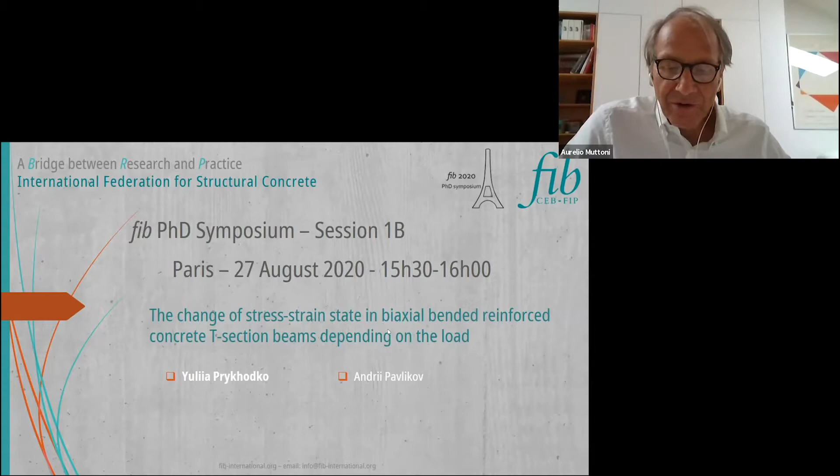Good afternoon, our best wishes from Poltava, Ukraine. The topic of my work is the change of stress-strain state in biaxial bended reinforced concrete T-section beams depending on the load. The authors of this work are Yuliia Prykhodko, myself, and Andrii Pavlikov, my PhD thesis supervisor. We are from National University Yuri Kondratyuk Poltava Polytechnic.

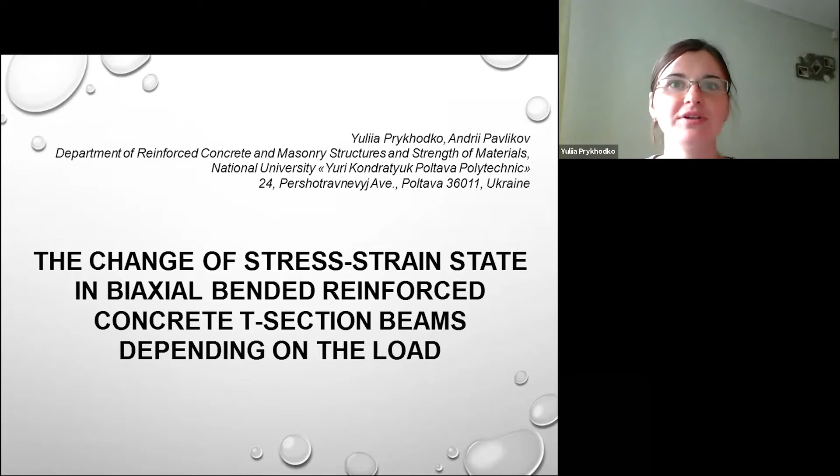In today's world, the building industry is still considered one of the most important and influential in the world. It is connected with all economical and political spheres of social life. For the development of the building industry, it's necessary to constantly improve and automate methods of calculation of building structures.

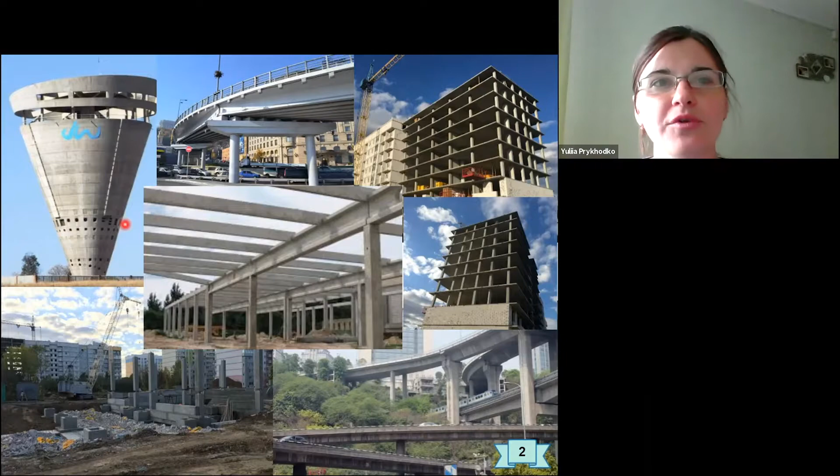In this case, an important step is the use of the stress-strain state modeling method in order to analyze the possibilities of the elements' work under compression, biaxial bending, and torsion.

Particular attention is attracted by the necessity for process-changing knowledge of the stress-strain state parameters in the normal section of reinforced concrete T-section beams. Especially important is the knowledge about the compressed zone shapes, which are determined by the position of the neutral line in the cross-section through the parameters.

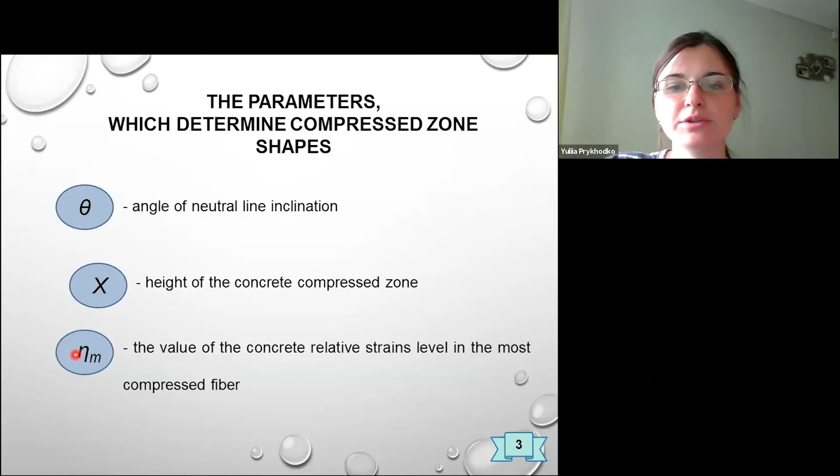They are: theta, the angle of neutral line inclination; x, the height of the concrete compressed zone; and eta sub m, the value of concrete relative strains level in the most compressed fiber.

In our work, we have identified possible shapes of the compressed zone for biaxial bended T-section beams. They are triangular, trapezoidal case 1, trapezoidal case 2, pentagonal case 1, pentagonal case 2, and hexagonal.

For each form, in the process of integration, analytical dependencies are obtained, by which it's possible to determine the coordinates of stress resultant application in such zones. For better visual perception, stress-strain state models in the normal section of the reinforced concrete T-section beam were constructed.

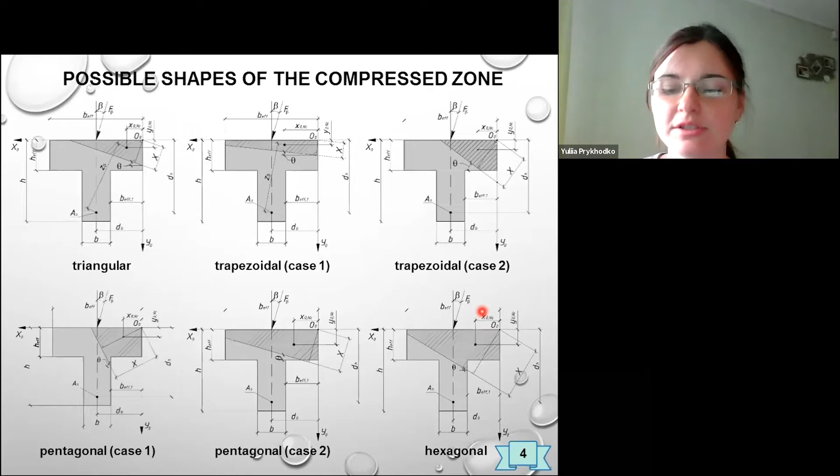To create the stress-strain state model of the bended reinforced concrete T-section element, a nonlinear diagram of the stress-strain relationship for the compression concrete was used.

For the convenience of theoretical research of the stress-strain state, the stress distribution law in the coordinate system x sub 0, O sub 0, Y sub 0, depending on the coordinates x sub 0 and y sub 0, with k equal to 2, was used.

For your attention, there are given the formulas of stress resultant in the concrete compressed zone, N sub C, and its application coordinates x sub 0 C and y sub 0 C for different forms of the compressed zone.

Here you can see the triangular shape. The stress resultant N sub C is equal to this expression.

During integration, we can find that N sub C is equal to this formula, where omega sub 1 is the completeness coefficient of the stress distribution diagram in the compressed concrete zone of triangular shape under biaxial bending.

Application coordinates x sub 0 C and y sub 0 C of stress resultant N sub C in the compressed concrete zone are equal to these expressions.

In these formulas, S sub C x0 and S sub C y0 are equal to these expressions, where phi sub x1 and phi sub y1 are the completeness coefficients of the stress distribution diagram in the compressed concrete zone of triangular shape under biaxial bending.

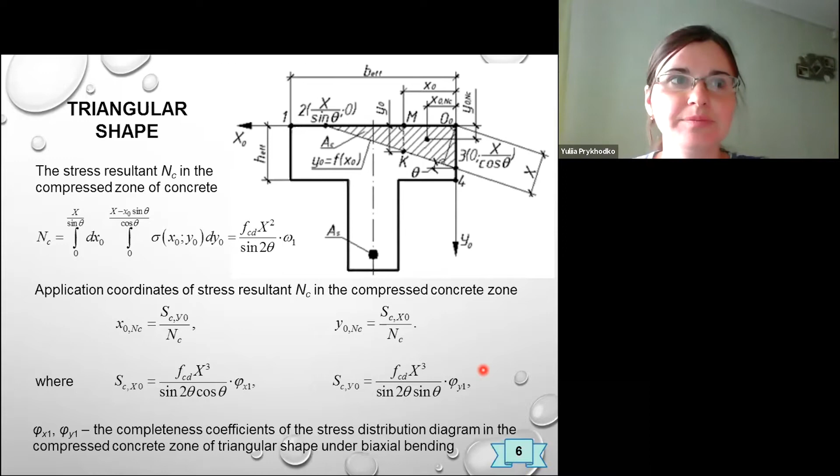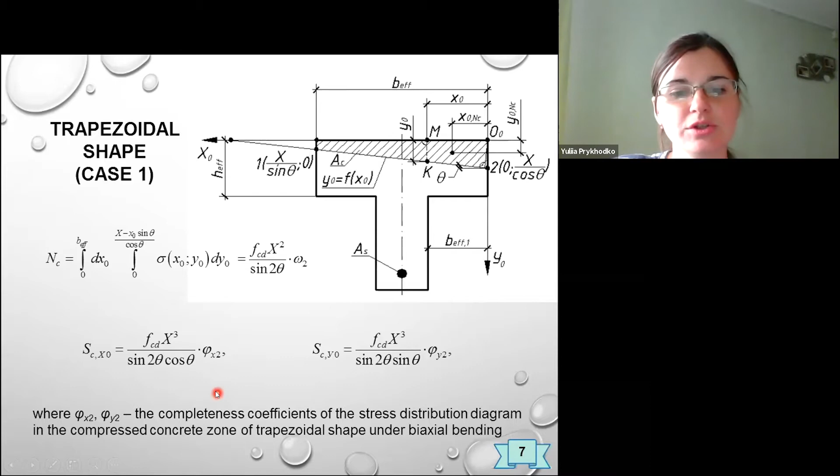Here you can see trapezoidal shape case 1. The stress resultant N sub C in the compressed zone of concrete for this case is equal to this expression. Components S sub C x0 and S sub C y0 for finding the coordinates x sub 0 and C and y sub 0 and C of stress resultant NC are equal to this expression, where phi sub x2 and phi sub y2 are the completeness coefficients of the stress distribution diagram in the compressed concrete zone of trapezoidal shape, case 1, under biaxial bending.

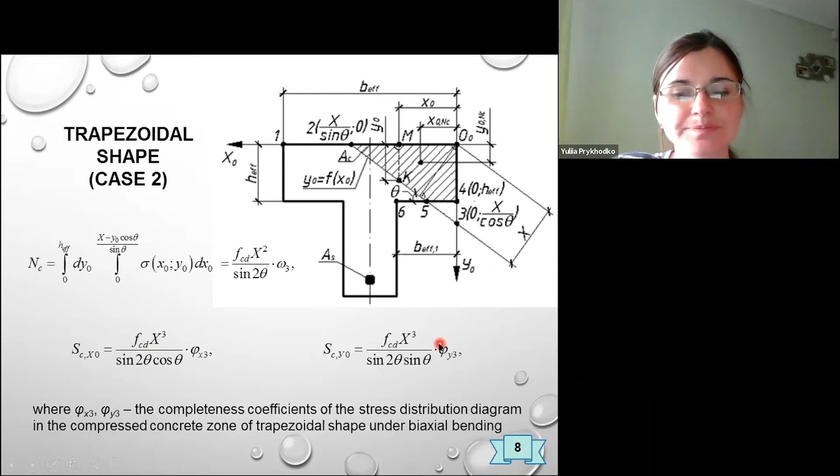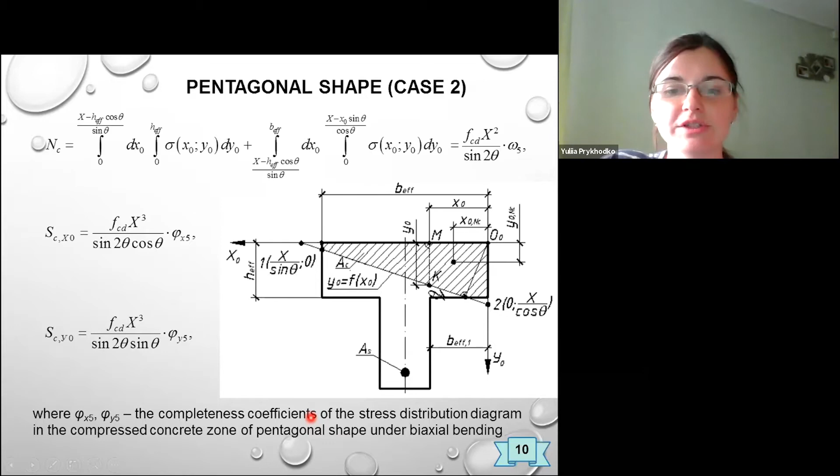The stress resultant N sub C in the compressed zone of concrete for this case is equal to this expression. Components S sub C x0 and S sub C y0 are equal to these expressions. Also phi sub x5 and phi sub y5 are the completeness coefficients of the stress distribution diagram in the compressed concrete zone of pentagonal shape case 2 under biaxial bending.

Here you can see hexagonal shape. The stress resultant N sub C in the compressed zone of concrete for hexagonal shape is equal to this expression. Components S sub C x0 and S sub C y0, for finding the coordinates x sub 0 and C and y sub 0 and C of stress resultant N sub C, are equal to these expressions.

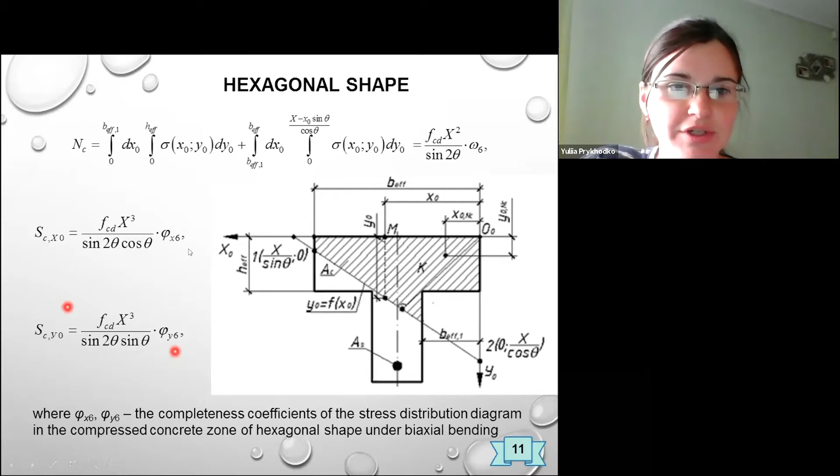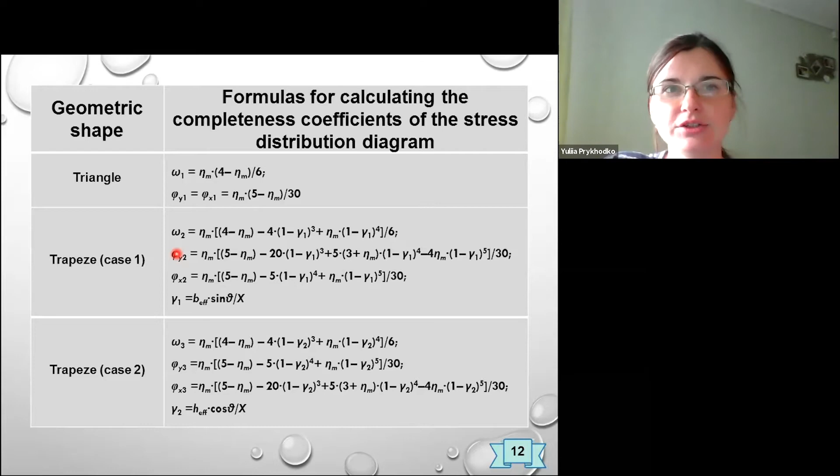There are shown formulas for calculating the completeness coefficient of the stress distribution diagram. This table shows the formulas for the triangular and trapezoidal forms of the compressed zone. Formulas for pentagonal and hexagonal forms are similarly derived.

Using the equilibrium equation of stresses in the normal section of a biaxially bent reinforced concrete T-section beam, with the use of Microsoft Excel and AutoCAD software, models of the stress-strain state at values eta sub m equal to 0.5, in case of a trapezoidal form of the compressed concrete zone, and eta sub m equal to 1, in case of a triangular form of the compressed concrete zone, are made. Using the presented models, analytical dependencies were obtained to determine the basic parameters of the neutral line position in the cross-section of the biaxially bent reinforced concrete T-section element.

As shown by theoretical research, at low load levels the stress distribution law has a linear direction. With the increase of the load, the stress distribution diagram becomes warped. The height x of the compressed zone of concrete and the angle theta of the neutral line inclination decrease.

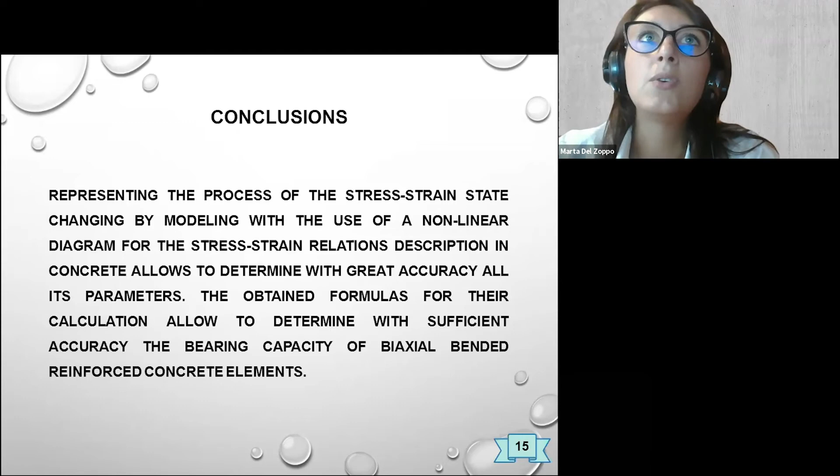Yes, it's only a theoretical part so far, and maybe till the end of the year we want to do experimental work, and we will compare our theoretical investigations or data with our experimental data with different setups. Yes, we will get deformation from the experiment, and then using this deformation we can compare the stress level in experimental and theoretical work, and then we will give maybe some recommendations on how we can use our theoretical data, and what is the difference between this data.

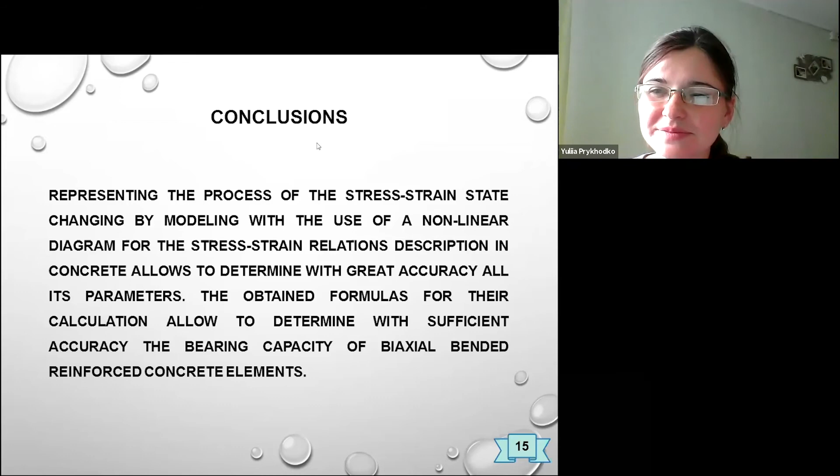May I ask you a question? Sorry, no, please ask. May I ask a question related to slide number 14, please? The previous one. Yes, so you have the compression zone here.

I don't understand, you also account for a tensile zone here. The tensile zone and compressed zone are here. And what do you account for here with these tensile stresses? So this is the compression zone, but it seems that you also have a tensile zone here, right? Do I understand correctly? Yes, tensile zone. And where does it come from?

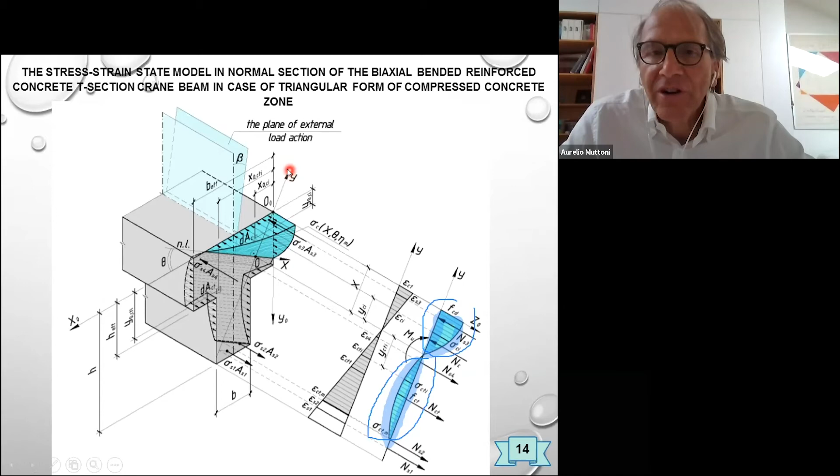Are you accounting for concrete tension? Yes, we have the neutral line and the line of x, y. We have the law for the compressed concrete zone. We can use this law for the tension zone too, but in the tension zone we use not sigma sub C, but sigma sub CT for the tension zone.

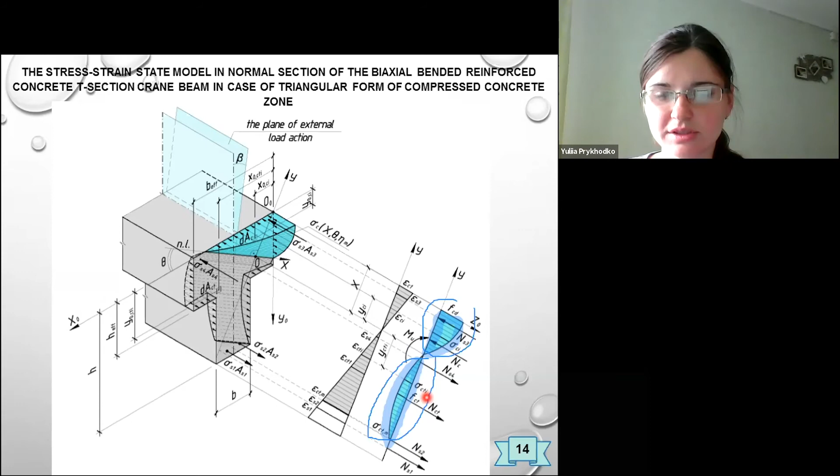Okay, but analogical on the other side, yes. I see, so this is for a verification at ULS. Yes, tension stresses in the tension zone are less. Yes, and this is for a verification at ultimate limit state, right? Yes. Okay, so is this allowed according to your standard? Yes, we use not only the standards of our country, but also Eurocode too.

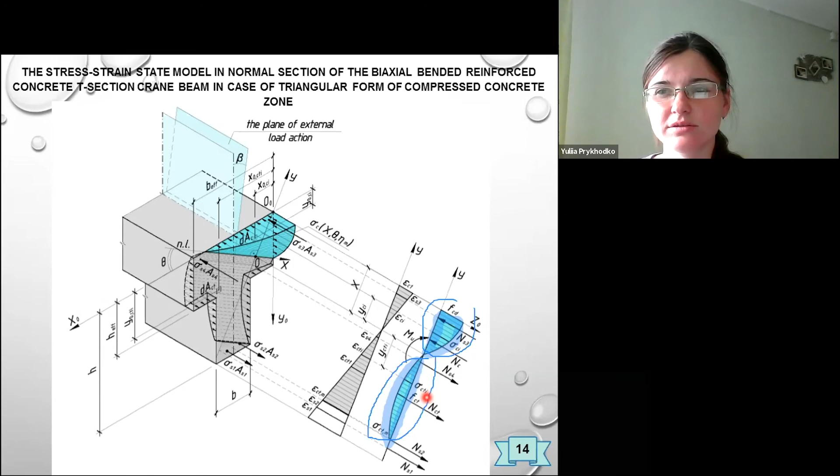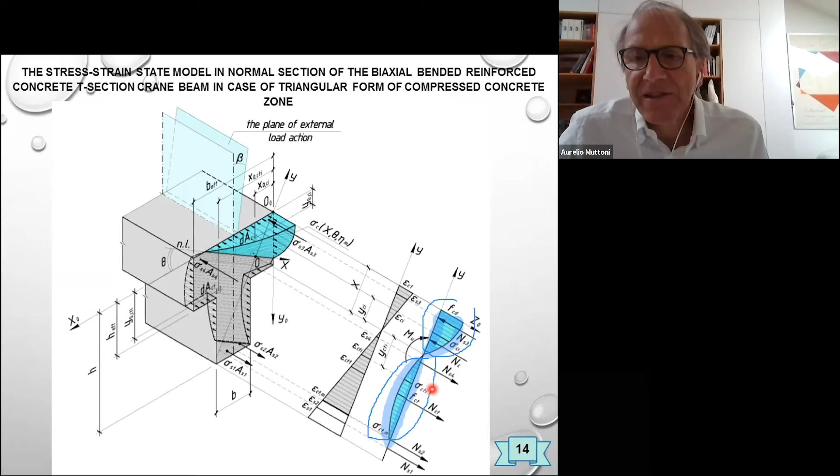Okay, good, I have another general comment. It seems that you have chosen a stress-strain relationship which can be easily integrated, right? Is this the criterion to choose the stress-strain relationship? Yes, we use integrals and the law of stress-strain. Yes, but of course you also assume that plane sections remain plane.

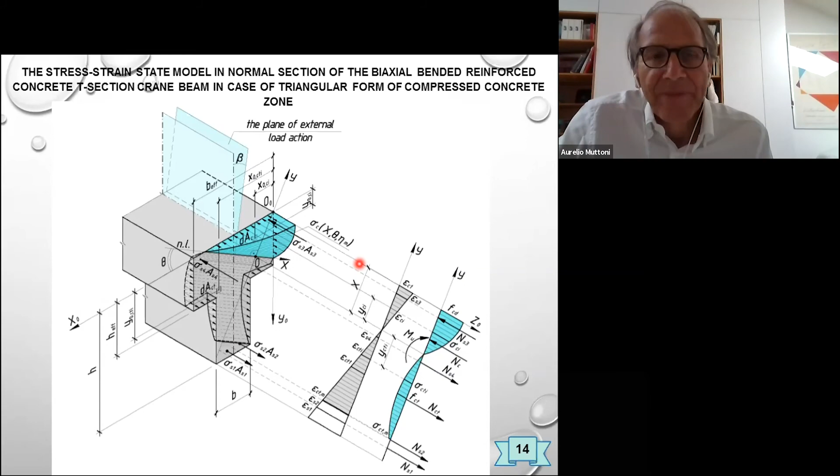With respect to the so-called stress-strain relationship, here I have a comment. There are two methods to derive such a stress-strain relationship. One is, for instance, to test cylinders and measure directly the stress-strain relationship. But here, in fact, we have a quite different phenomenon. We are not discussing the stress-strain relationship itself, but the distribution of stresses in the compression zone.

And in the past, the most precise approach is to derive the so-called stress-strain relationship not directly from tests on pure compression, but by back calculation of bending tests. This is the approach that was done in the 50s and 60s, and it is followed in many standards. For instance, the parabola-rectangle stress distribution in Eurocode is not derived from a compression test, but from the back calculation of a bending test, and this describes the reality much better than the approximation based on a compression test.

So my last question was, how do you derive exactly this stress-strain relationship that you're showing here? Using integration. But you will integrate it, you have to assume a stress-strain relationship first. We use a stress-strain relationship, it's just a parabolic relationship. Parabolic. We use these formulas for this moment, and then...

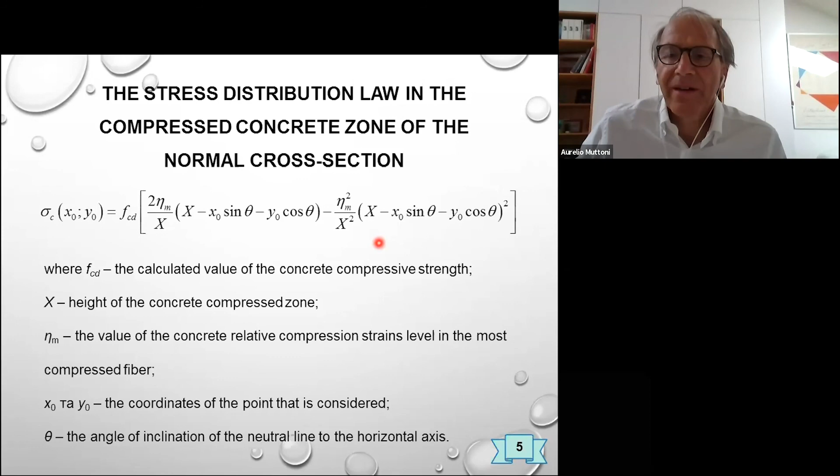But this formula, where does it come from? It's not the straight formula from Eurocode, but it's based on this formula, using parallel movement. One moment, maybe parallel movement, because of the axis, maybe I will show.

I guess we are running out of time. We think from this axis, from this axis, we move to y sub 0 by turning and moving parallel to this axis, and then we get that formula.